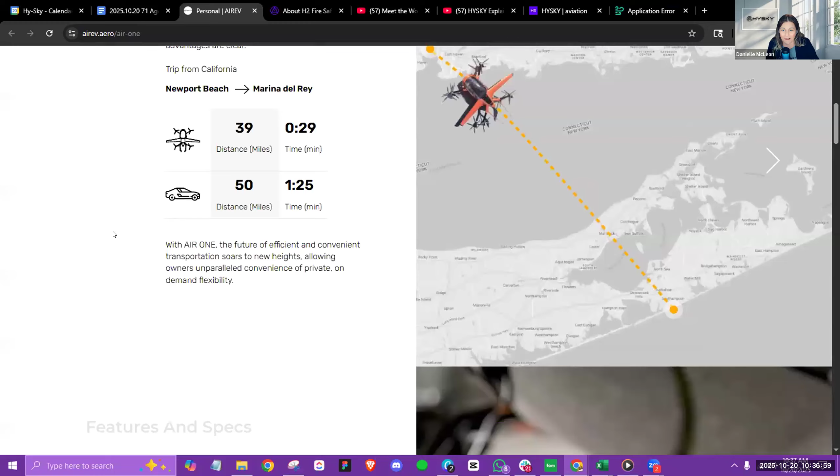Okay, so now I want to show you this company, which was kind enough to invite HySky Society to their live flight demo this morning. Unfortunately, we couldn't make it in person, so we had planned to live stream it and show you guys their flight, but again, because of the AWS stuff, we could not get it coordinated.

However, we did get some videos. So these just happened, so you all will be the first to see these videos. Let me just get it pulled up. They were done on a phone, so the quality is not the best, but you're seeing it here first.

So here's the takeoff. And then here's another one.

So you can see how quiet it is. I mean, you didn't really hear it until it gets really close.

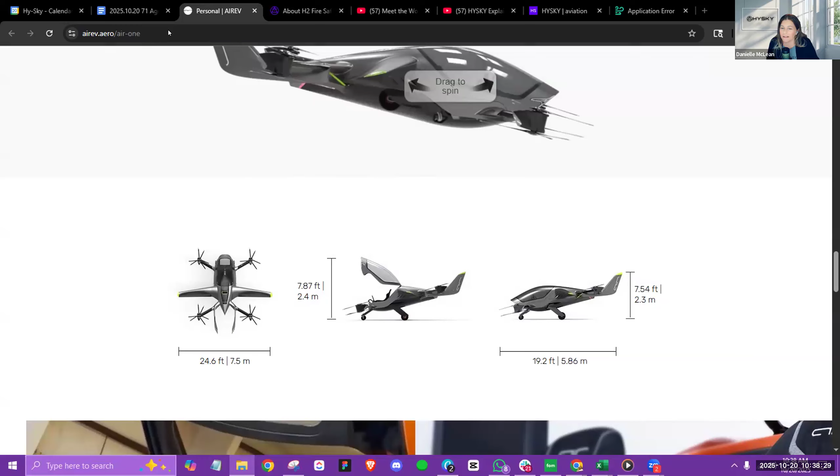So yeah, congrats to AIREV. They're an Israeli company, and this was in Florida that they did this morning. Very exciting. I wanted to be there in person. I was hoping we were going to catch the CEO's presentation, but the internet lords decided not to today.

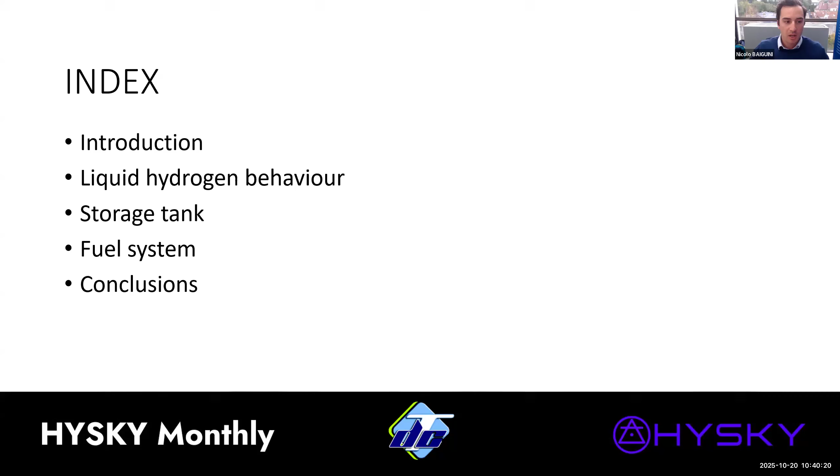Today I will present the EICLHAIR project, the development of a liquid hydrogen tank and fuel system for aviation. My presentation is divided into five parts: an introduction, the explanation of liquid hydrogen behavior, the storage tank, the fuel system, and the conclusion of this project.

Let's start with the introduction, where I present the context, the state of the art, the difference and the choice of the internal combustion engine instead of fuel cell, and the description of the project itself.

As you can see on the left, there is an image showing the direct and indirect CO2 emission by sector in 2010. Transport accounts for 14% of direct carbon dioxide emission, but almost zero for indirect. The main sources of carbon dioxide emission are electricity and heat power, agriculture and forestal and other land use, and industry.

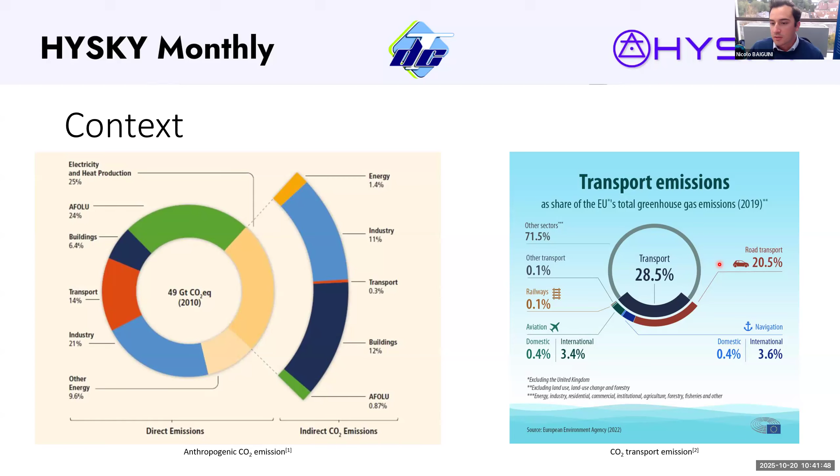How can we reduce emissions from aviation? First, we would like to reduce the on-ground time when the engine runs without moving the plane. Optimization of the flight path to reduce the distance between point A and point B. Increasing the energy efficiency of the engine, and using fuel that does not produce carbon dioxide, such as hydrogen, or at least has neutral CO2 production.

That means fuel produced from green sources, from captured CO2, or from biogas or biomass.

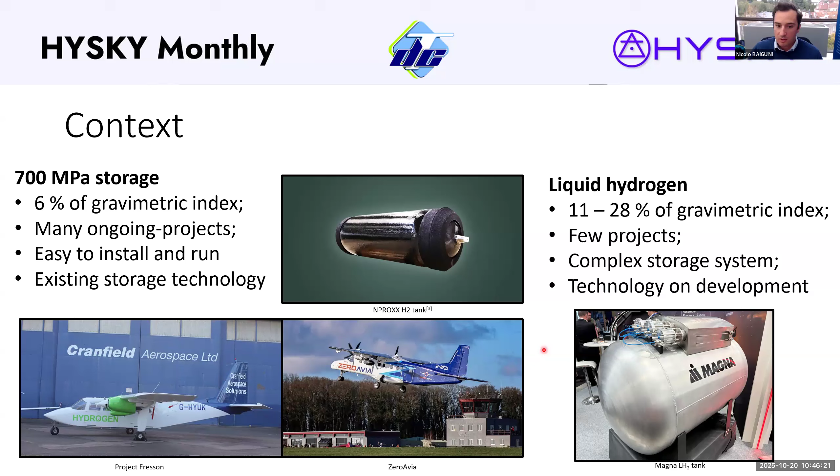Here is an example of storage technology from Magna, which is a liquid hydrogen tank, the kind they use for aircraft, but they are still prototypes. They are not yet at the same level as the gas technology.

The aim of this project is to develop a liquid hydrogen tank to run a fuel cell, which can guarantee at least 1,500 kilometers of range of flight.

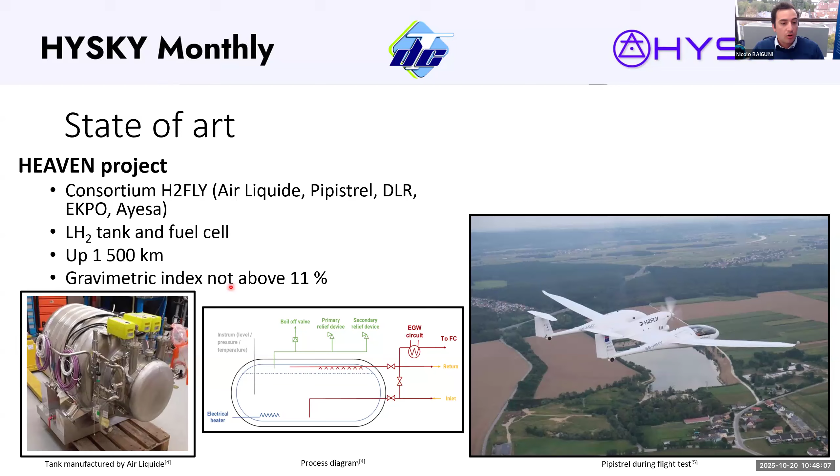This tank is based on the following process diagram reported here. We have a heater to maintain the pressure in case of pressurization of the tank. The liquid hydrogen is extracted simply by the difference of pressure between the tank and the fuel cell. In case of over-pressurization, there is a boil-off of gas and a relief device that reduces the pressure in the tank. A heat exchanger is present to convert liquid hydrogen into gas. This kind of technology did not overcome the value of 11% gravimetric index.

Another project is carried by Aresia, which is developing a liquid hydrogen tank and fuel system for a sport car. Why do we talk about a sport car? Because it's very similar to the fuel system and power unit of a light aircraft.

On the left, you can see the cross-section view of the tank. You can clearly see the support, the gas and liquid pipe. The boil-off valve you cannot really see, but it is here. In this image, we can see the type of thermal insulation they're using is MLI, multi-layer insulation.

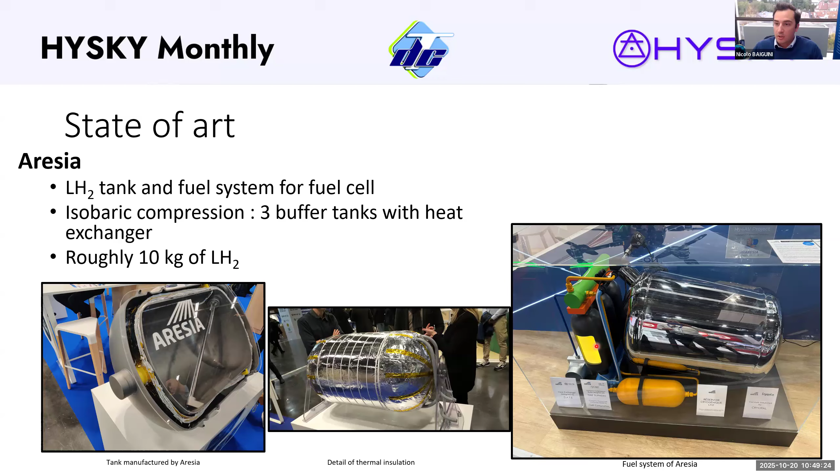However, the fuel system is completely different from the previous one. They are using 3 buffer tanks to make an isobaric compression. In the first tank, the liquid hydrogen is charged. In the second tank, this liquid hydrogen is converted into gas by using a heat exchanger. And the third buffer tank works to deliver the hydrogen to the system.

Another interesting case, even though this project is developed for a sport car, as I said before, it's very interesting for light aviation, is the Toyota GR Corolla H2, where they have developed a liquid hydrogen tank and fuel system for a spark engine.

The tank manufacturer is Ube-Shinko company, and in this report we can see that the cross section is oval and they're manufacturing the tanks in aluminum. Why did they use this type of cross section? Because they can increase the volume tank to volume occupied ratio, which allows them to store something like 15 kilograms of liquid hydrogen.

The fuel system is different, as reported in this image. You have a buffer tank, pumps, a catalyst to convert the boil-off gas, and an exhaust gas heat exchanger. This image here is just to give you an idea of how the Toyota GR looks.

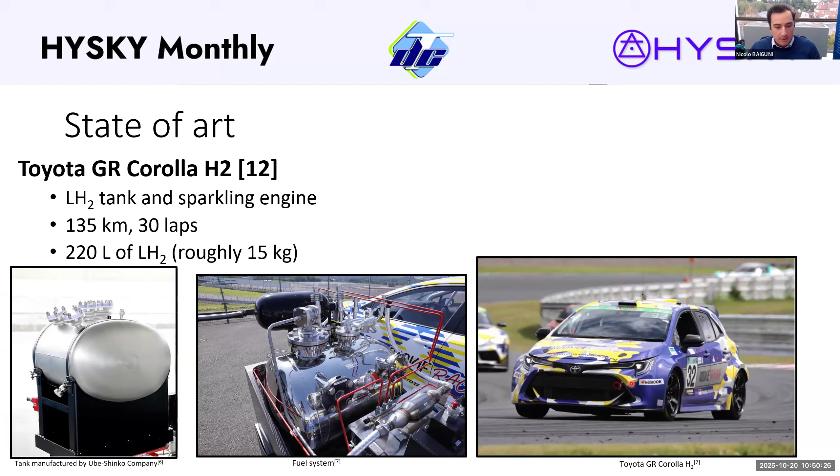Anyway, using a spark engine has some drawbacks: NOx production, noise, vibration, but they are based on common materials such as iron and aluminum, which are easily available on the market. Hydrogen spark engines are very similar to existing gasoline engines, so they allow easy maintenance, contrary to fuel cells, which are actually a brand new technology. There's not so much maintenance knowledge around the world, and they need expensive materials. Of course, a fuel cell does not produce pollutants and is more efficient.

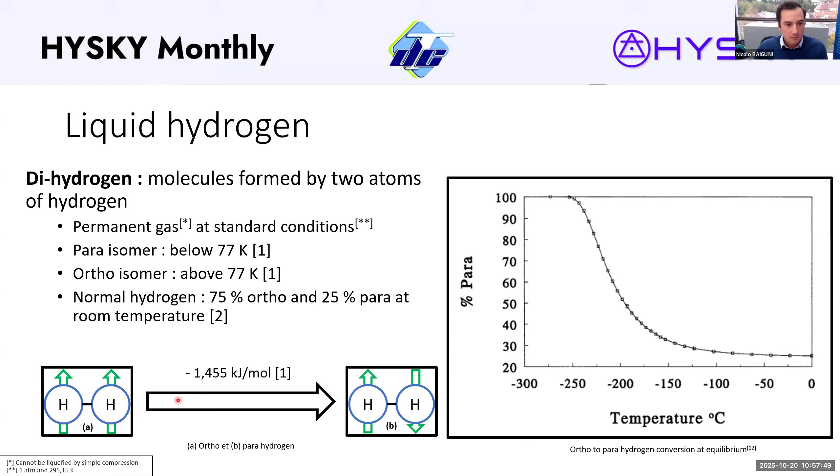What is liquid hydrogen behavior? Roughly speaking, it's the variation of pressure, temperature, and filling ratio over time. The variation of these variables depends on three main phenomena: evaporation, thermostratification, and self-pressurization.

And of course, it depends on the design parameters such as input geometry and maximum operative pressure of the tank. So how do these variables change in time? They change mainly as a function of the heat inputs on the tank. So how the heat moves from the outside to the inside of the tank. Now, why do we have heat inputs?

Because there is a very large temperature difference between the outside and the inside. Inside, we have minus 253. Outside, there are temperatures ranging from minus 10 to up to 70 degrees Celsius. So it will pass from the wall, as indicated here, will pass from the support, from the pipes, and will be instrumentation, if we have some instrumentation inside.

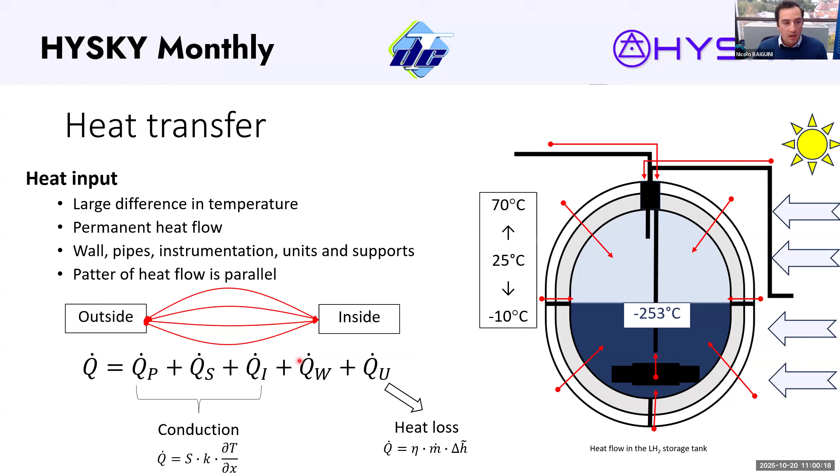But the heat transferred from the wall depends on how we design the thermal insulation. Now, how the heat moves from the outside to the inside through the walls depends on different steps. Firstly, the heat must flow from the air to the external wall, then pass through the insulation, and then move to the internal wall.

When the heat arrives at the internal wall, it moves to the liquid or to the gas. Now, the heat along this entire pathway remains constant. The heat that moves from the outside to the external wall may depend on radiation. For example, on a sunny day, radiation from the sun will increase the heat input. Or if there is wind, we may have forced convection that transfers more heat to the vessel.

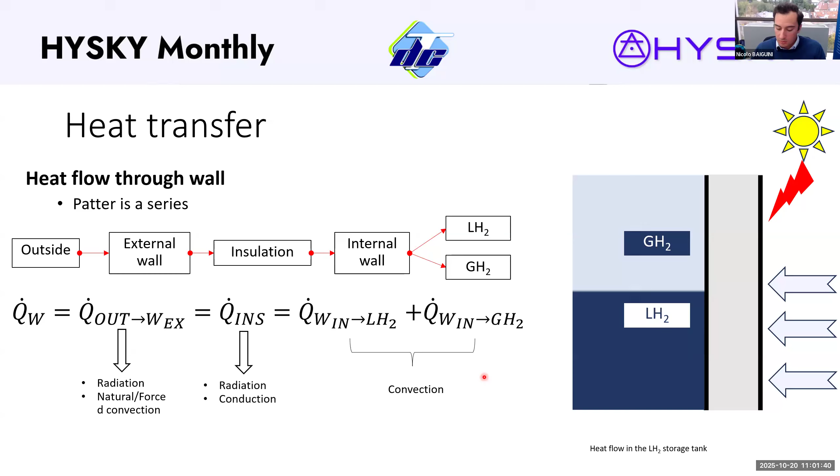The heat that is transferred into the insulation mainly depends on radiation and conduction. So if you use, for example, vacuum and MLI, the heat will mainly be transferred by radiation. If you use foam, the heat will be transferred more by conduction. At the end, the heat that is transferred from the wall to the fluid depends on convection, so how the liquid moves inside the tank.

But the ullage is thermally stratified due to the heat input that comes in, and because there is not enough natural convection to keep the temperature homogeneous.

Now, we can roughly say that all the heat that comes from the environment is converted into evaporation heat, and this evaporation heat depends on the pressure they're working at. If we increase the working pressure, the latent heat of evaporation reduces, which actually increases the evaporation rate.

So when we are in a very small tank, for example on light aviation, we cannot allow the boil-off gas to exit the tank because we don't know what to do with this boil-off gas. So usually we close the tank, but by closing the tank, we increase the amount of heat and mass that is trapped in the ullage. We actually increase the pressure. This increment of pressure is what we call self-pressurization.

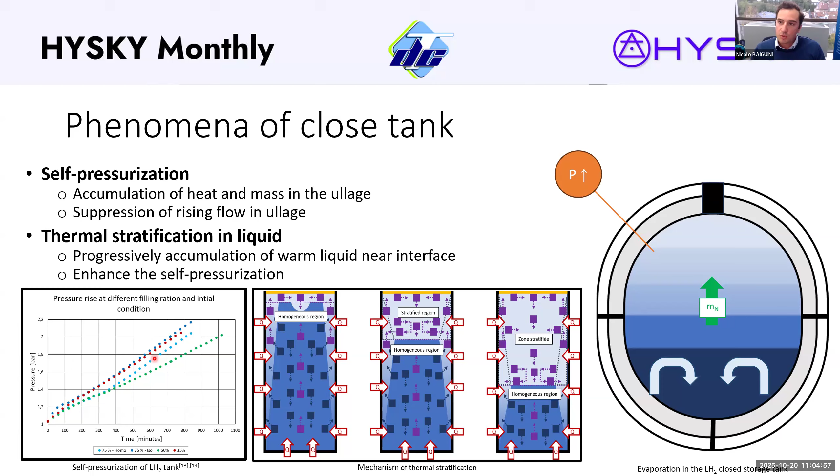Now, sloshing is another important phenomenon that can occur on a light aircraft, because the tank is moving. It may happen when the tank stops, for example when landing, and the liquid moves. So if the tank is open, we expect the liquid will climb on the surface, and the hot surface will be quickly cooled down, creating an excessive production of boil-off gas. It's almost instantaneous, it does not really impact the system.

Now let's move on to how we have designed the tank and our approach to designing it. In this part, I will present the architecture of the tank, the rules that we used, the operating pressure, how the mass has been optimized, how we chose the shape of the tank, how we designed the thermal insulation, and the system for controlling the pressure.

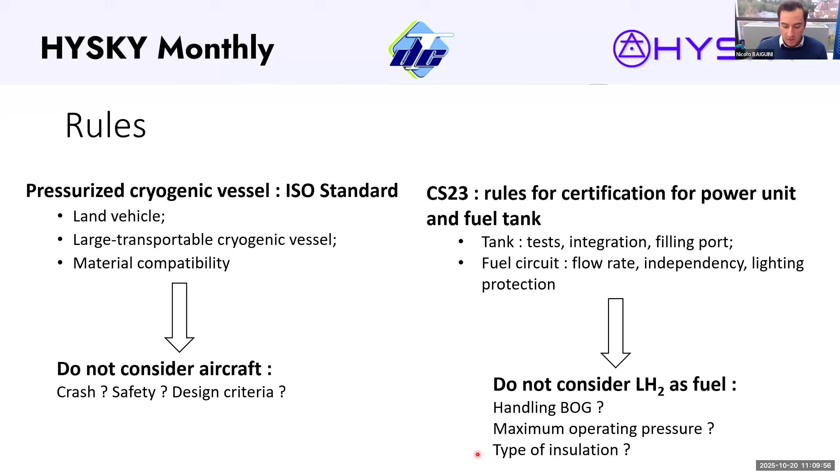So how do we do it? We started by looking at the operative pressure. There are two operative pressures, the maximum and the minimum. The minimum pressure must be above 1 atmosphere to avoid air leakage into the tank, but the maximum operative pressure depends on the geometrical form, material of the tank, and all the necessary inputs.

Now, this operative pressure directly affects the mass of the tank, which is composed of the mass of the liquid hydrogen, the mass of the insulation, the mass of the support, and the mass of the inner vessel, the mass of the jacket. The mass of liquid hydrogen we carry inside includes the mass lost in evaporation, the mass of useless fuel, and the mass that must be kept inside as usable fuel.

Now, if we increase the thermal insulation a lot, we can minimize the hydrogen lost by evaporation, but we increase the mass. On the other hand, if we reduce thermal insulation to the minimum required value, we increase boil-off a lot, losing more hydrogen by evaporation. If we increase the operative pressure as reported here, we simply increase the thickness of the wall, which increases the mass.

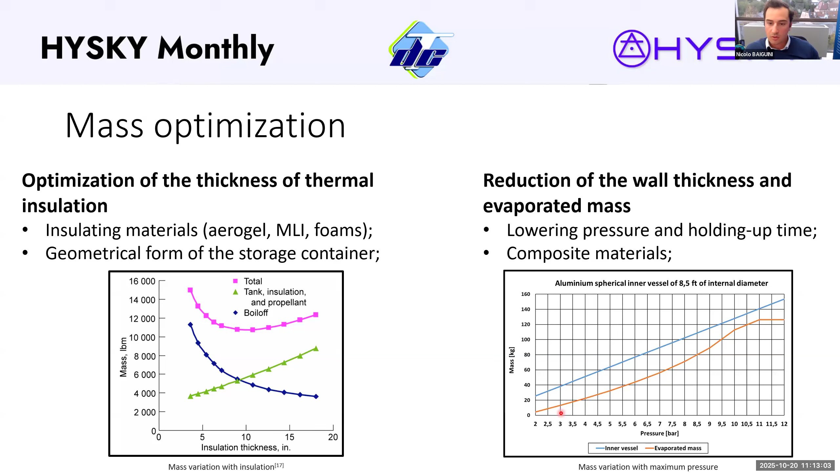Now, regarding the shape of the tank: if we look at how aircraft are built, you can see tanks are placed on the wing and in the center of the aircraft, as reported here, showing the Boeing fuel tank of the 787.

As we can see, the form of the tank is, roughly speaking, cuboid or parallelepipedic. We may think that to design the shape of the tank, we should try to fit a sphere in a cube or a cylinder. Between sphere and cylinder, it's better to use cylinders, as shown here, since the tank volume to occupied volume ratio is higher.

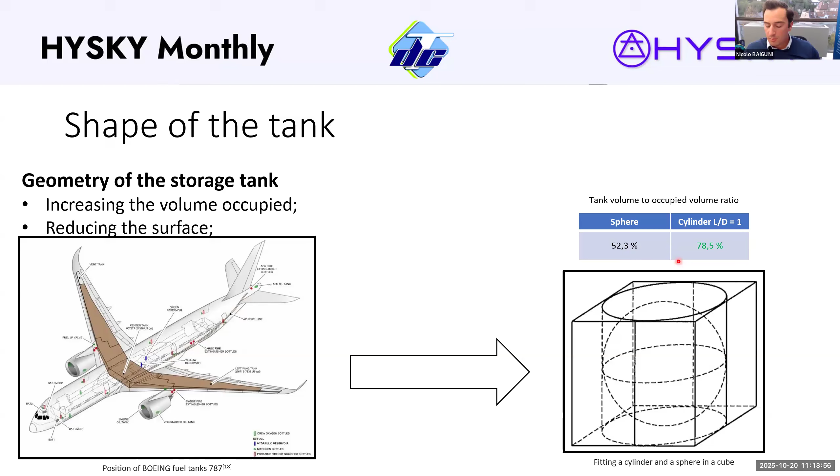But actually, this is not the right way to approach it. If you look at this image, the cross-section geometry of an aircraft is not a cube, it's a circle here, an ellipse there. So the problem is how we can fit a tank into a circular sector. The circular sector is the green part here, which corresponds to that part of the cross-section area of the aircraft.

Now, looking at the kind of geometry, we can easily see there are two types of cross-sections that can fit: elliptical or oval, as shown in this image comparing the cross-section for an oval and an ellipse. The ellipse is the red line, the oval is the blue line.

You can see that an ellipse can have a higher cross-section, which means higher volume. So if we apply this concept to the IC-10, we can clearly see that the cross-section should be an ellipse. So the cross-section of the tank should be elliptical or spherical at least.

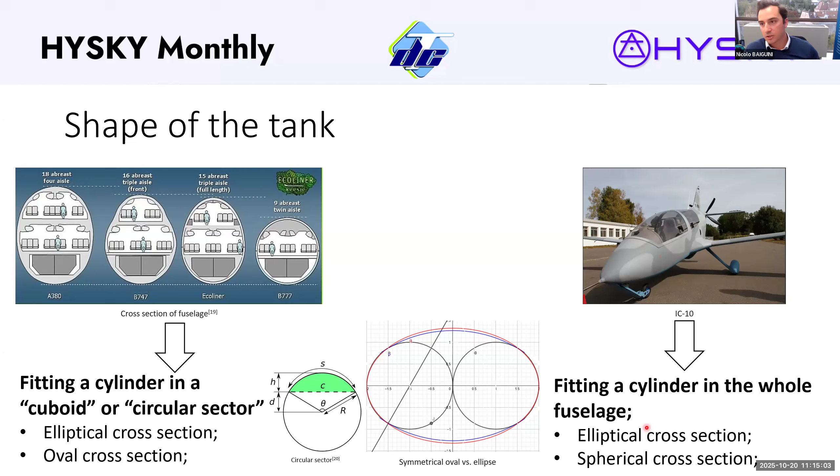Now, the shape of the tank also affects the tank volume to occupied volume ratio. As we can see, if we compare the circular cross-section to the elliptical section, the elliptical section allows much more tank volume to occupied ratio, and this ratio increases with the ratio between the major axis and the minor axis.

At the same time, we have some problems dealing with pressure, because as reported in this analysis of deformation of an ellipsoidal section of a cylinder, the maximum deformation in this type of cylinder is on the maximum axis. The circular section does not have this type of deformation because it's much more uniform over the surface. So we need to stay low on pressure if we want to have an elliptical tank and increase the volume to tank ratio.

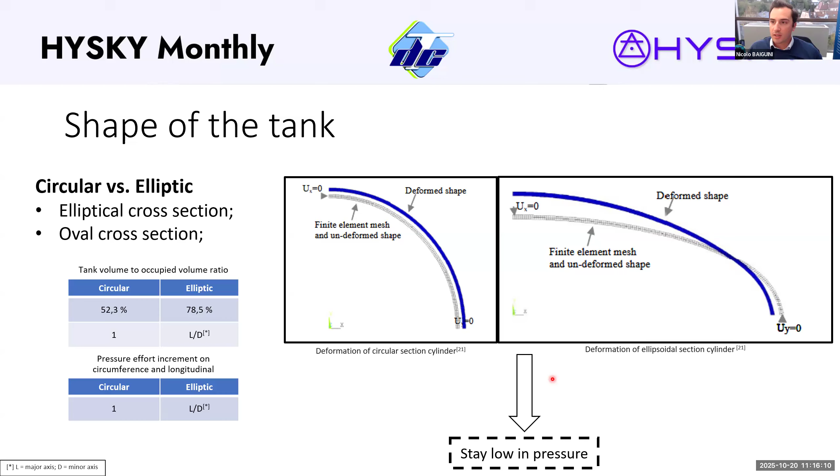Now, thermal insulation, how do we design it? We have to keep in mind that we have to reduce as much as we can the heat input, and at the same time, we have to reduce the mass.

Now, the heat that comes from the pipes can only be reduced by increasing the length of the pipes. For example, this has been done by the Netherlands Aerospace Center, where the tube is not straight, but shaped like a spring, which is done to increase the length and reduce the heat input.

but we cannot really work on the length because it's fixed by the vacuum jacket, but you can work on the material. So if you use polyamide as reported in this case, you can strongly reduce the heat coming from the outside. And also we would like to reduce the surface contact. One example is given here, where we have used a composite ring to minimize the surface of contact between the outer and inner vessel.

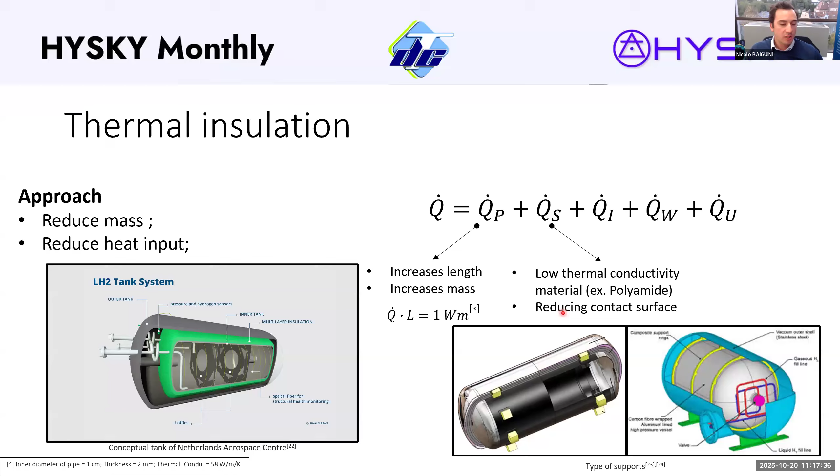But if you want to reduce the heat coming from the surface, there are three main insulating materials that can be used: foam, aerogel, and multi-layer thermal insulation.

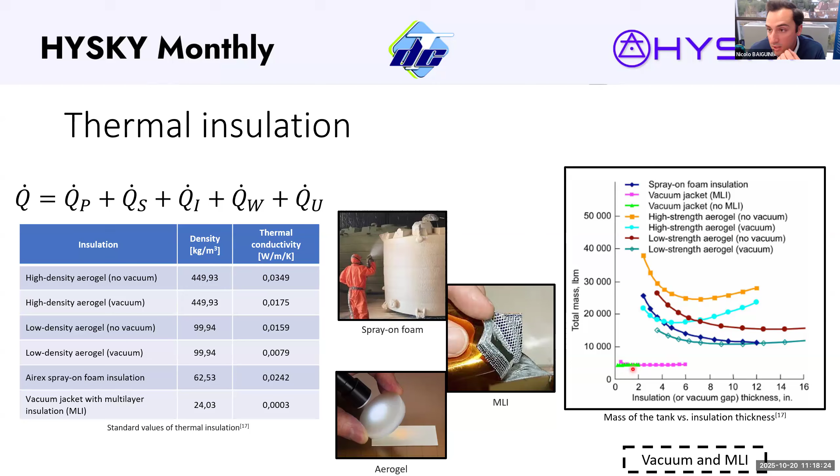Thanks to NASA, who did a lot of work on that, they have published results concerning the amount of mass required to insulate a liquid hydrogen tank for different types of technology. As we can see in this measure, the vacuum jacket with MLI technology, which is the purple line here, allows the minimum mass to guarantee the same amount of heat input into the tank. So this means that MLI for a liquid hydrogen vessel is a very good choice.

Now, the last part is how we control the pressure inside the tank. We don't want to have overpressure or depressurization of the tank. So to avoid depressurization, we can use a pressurization gas, which is often helium.

We can return part of the gas that we are feeding to the engine back to the tank, or we can use a heater. Usually, using a pressurized gas is actually expensive because we need to install a pressurized vessel. Helium is really expensive, but its main advantage is that it's simple.

Return gas technology is simple, but we have to consume some fuel to pressurize the vessel. And the heater, of course, does not need fuel consumption, but we have some heat leakage that can enter from the pipe of the heater, and of course adding heat when we want to keep it cool is not very ideal. So for us, it's better to stay with a return gas solution.

Now, how do we avoid overpressurization? It's very simple. We use a boil-off valve that opens when the pressure is above a certain value. We can use pumping, using a pump that can create the same effect as sloshing inside the tank. And we can also use a cryocooler.

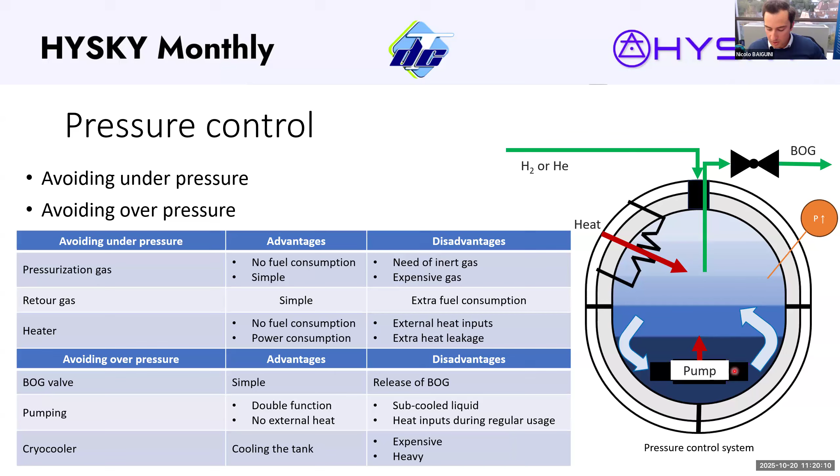Among these solutions, using a boil-off gas valve seems the easiest, and adding a pump inside the vessel also seems a good choice, because keeping pumps inside the vessel allows them to work more efficiently than outside.

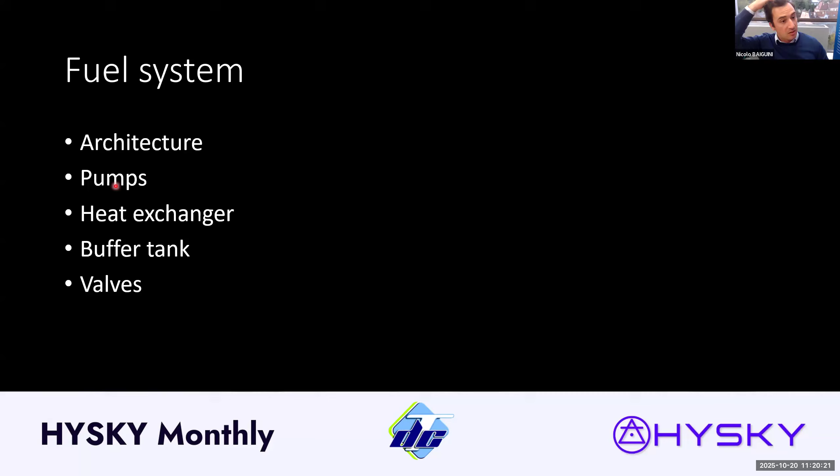Now let's move to the fuel system, which is the architecture: how the pumps have been designed, the heat exchanger, the buffer tanks, and the valves.

As you see, with cryogenic storage condition, we need to bring the hydrogen to a warmer condition, because we cannot feed a cryogenic condition inside the internal combustion engine. The pressure accepted by the engine is around 40 bar, and the flow of fuel actually changes a lot during the mission, as reported here. We start our mission with 100% amount of power, and we conclude the mission almost at 0.

So actually, we have seen that there is a high compression ratio, high temperature increment in the fuel system, and the flow is variable in time. So actually, we need valves to control the flow, a pump or compressor, heat exchanger, and buffer tank, roughly speaking.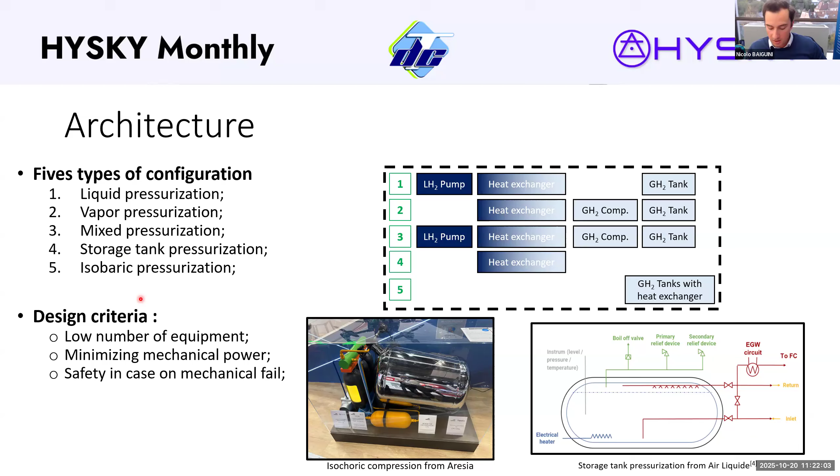We would like, as always, to reduce the number of equipment, minimize the mechanical power used from the engine, and ensure safety in case of mechanical failure. Now, if we consider the working pressure of the tank, the number of equipment, and the mechanical power, it is almost easy to understand that the better solution is to use liquid pressurization.

So using a simple pump and compression, and eventually a buffer tank, because we can guarantee the lowest value of pressure inside the tank, a relatively low number of equipment, and minimizing the mechanical power. Why? Because, from a thermodynamic point of view, pumping a liquid requires less energy than compressing a gas.

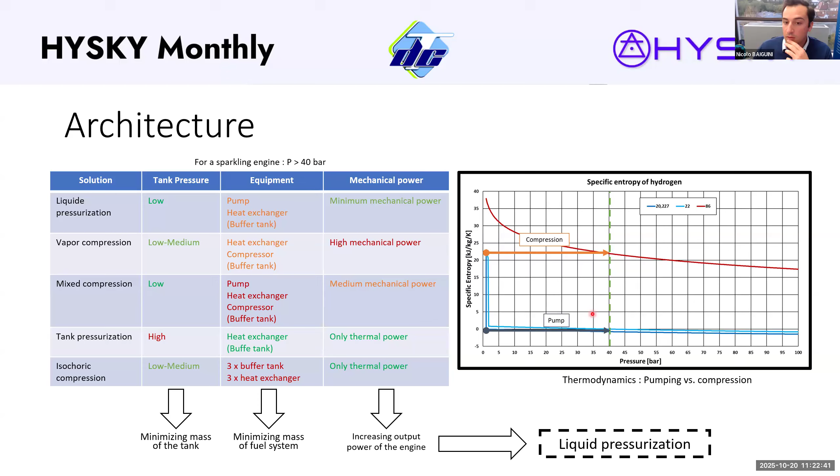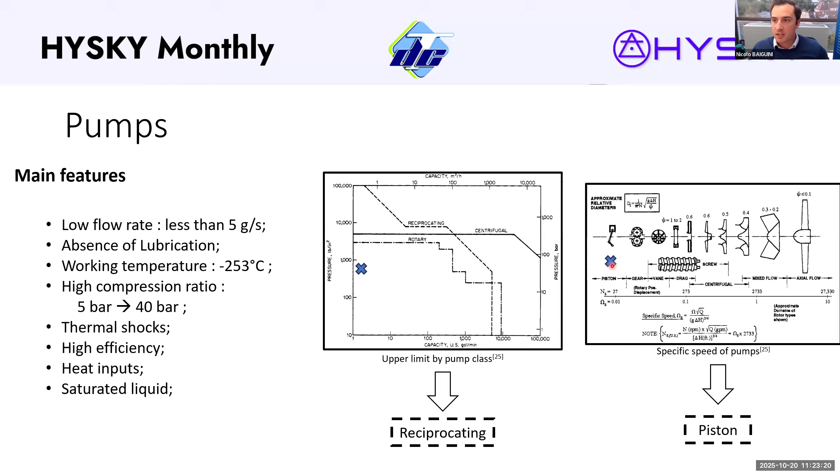There are different examples of existing pumps. For example, one from Toyota is used, but this type of pump is very heavy and big. The compression chamber is directly submerged in the liquid hydrogen, but the motor is outside, which actually is not very suitable because there are a lot of inputs to the system.

What seems most promising is using a magnetically activated pump, for example SCAMP pump from P3Tech, or using the one from cryo pumps from ILK Dresden. Anyway, these types of pumps are really expensive. They are still prototypes, at least for the German technology here, and they must be tested in an aircraft environment.

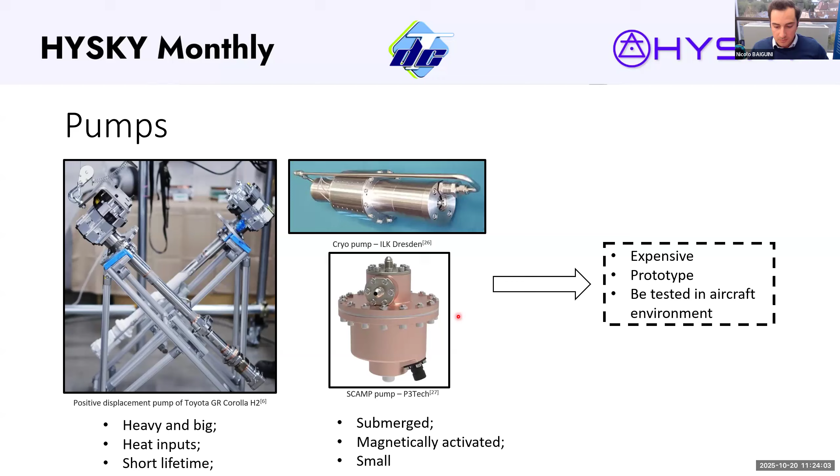Now, the other main unit is the heat exchanger. We would like to avoid the phase change of the heating fluid. There is, as said, a big temperature difference, and we want to use a fluid that is available on the aircraft, so air, exhaust gas, or cooling water.

Now, if you look at this table that synthesizes the main drawbacks and advantages of using each fluid, we can easily see that air is largely available, but very dependent on the altitude and weather conditions. We cannot go below 10 degrees Celsius. Exhaust gas is a little bit hotter and more stable in temperature, which can be a good solution, but it can affect the running of the engine.

And then you have the cooling water, which is actually at a temperature between 90 and 100 degrees Celsius. You can go down to minus 38 degrees Celsius if you add some glycerol. And if you do some rough calculation, we need 19 kilowatts to bring liquid hydrogen from minus 253 to minus 20, so roughly we would need 1.3 kilograms of air, which is a lot.

The exchange can be done with exhaust gas, but if you use cooling water, we can really see that we have a lot of water we can reuse for heating up the liquid hydrogen.

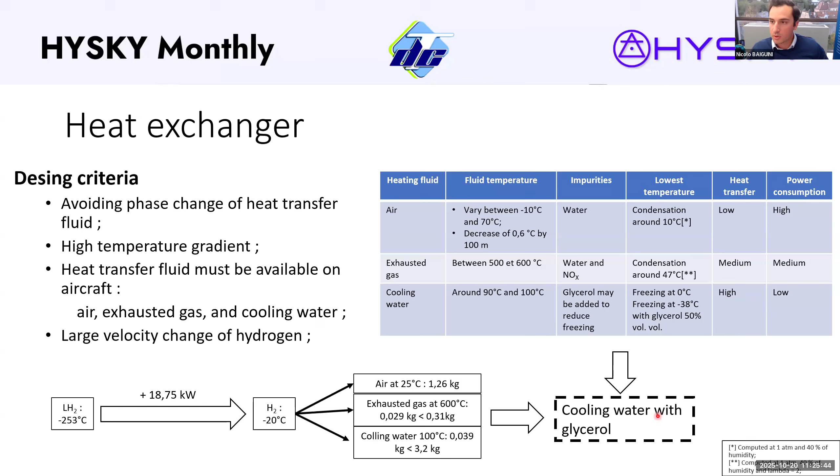So we think we can use that solution, the cooling water with glycerol. Now, we would like a simple configuration, because simple configuration means simple manufacturing, and we would like to minimize pressure drops. The solution we use is a double pipe counterflow heat exchanger, where the liquid hydrogen flows in the inner pipe and the heating fluid flows in the external pipe.

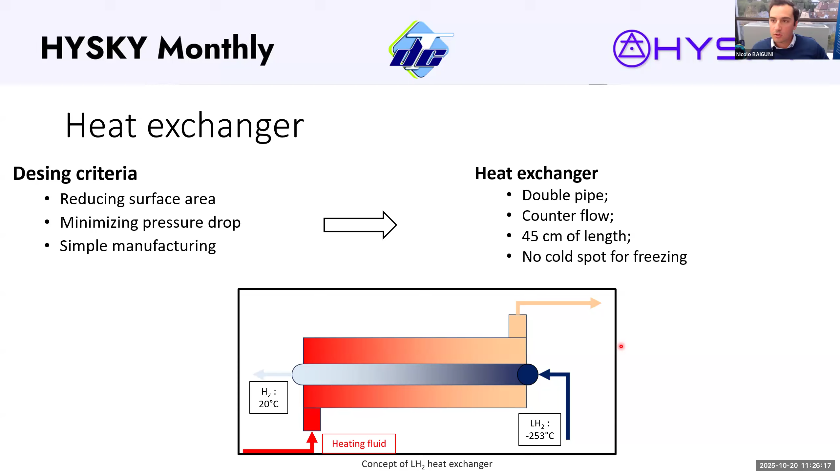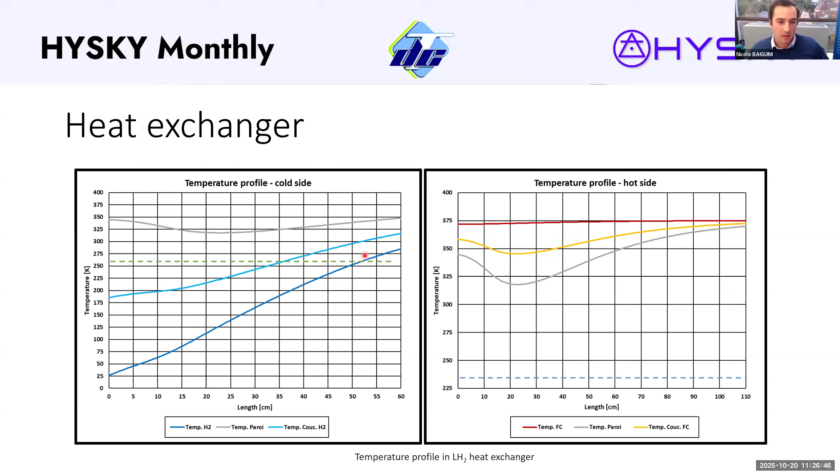Now, why do we need a buffer tank? Because we need to smooth the variation of the flow over time. We need gas for starting the engine. And if for some reason the pumps do not work, we need some hydrogen to run the engine and assure the function of the aircraft.

If you increase the pressure of the tank, we reduce the volume. That's what we want, but at the same time we increase the mass of the tank. This is not what we want, so we need to optimize this parameter to have a compact and optimized pressure buffer tank.

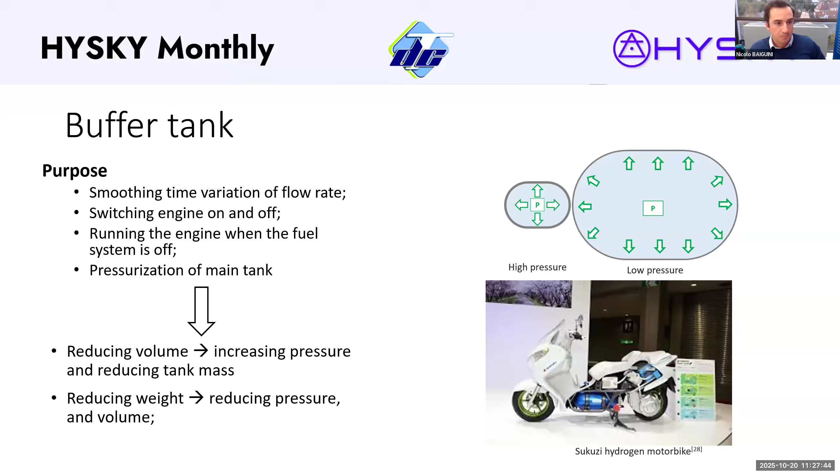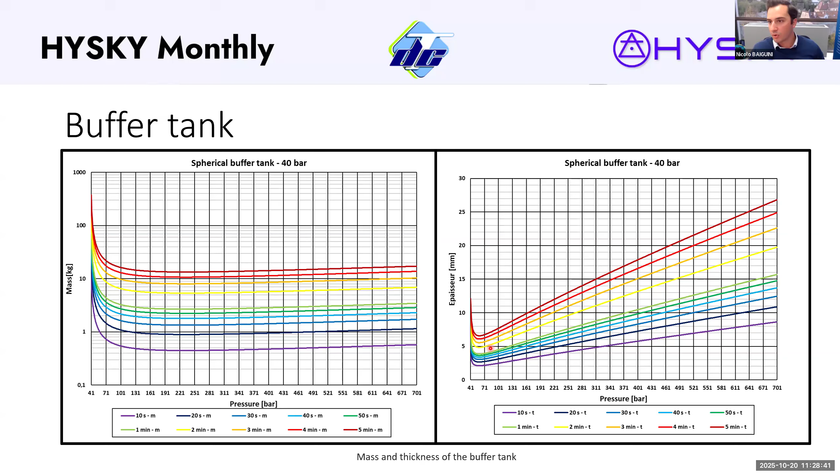It's hard to see, but there is a minimum value around 200 bar that minimizes the mass. And on the right, there is the behavior of the thickness of the wall. We can again find a minimum as a function of pressure, due to the way we reduce the volume when we reduce the pressure. So we reduce somewhat the effort on the material, but at the same time increasing the pressure means we bring more effort on the tank.

Now the valves are another important element of the fluid system. For the gas part of the fluid system, small scale valves already exist for hydrogen, and they can easily go down to -50 degrees. On the other hand, if you need valves for the liquid hydrogen part, the cryogenic part, they are hard to find, and maybe they do not exist.

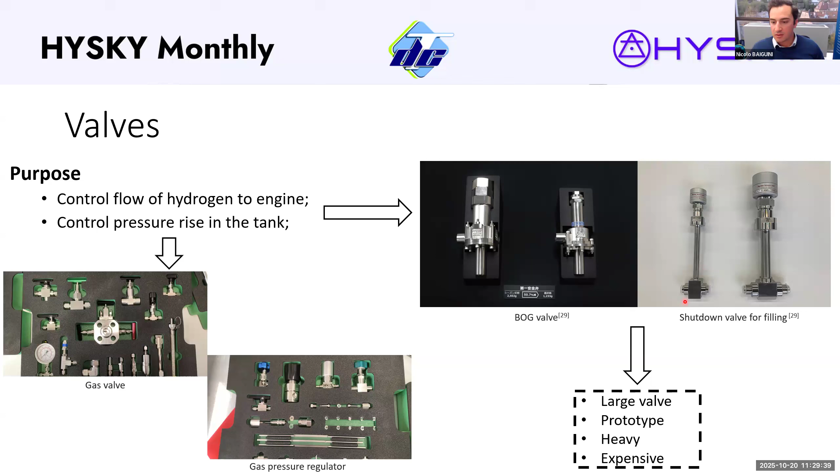Now let's move to the conclusion of the presentation. We have seen that even if aviation does not produce so much carbon dioxide emissions, we need to avoid it and change the fuel we use. We need to use hydrogen for aviation. We see that the fleet is very old, and liquid hydrogen can be used as a fuel.

We have seen the phenomena of liquid hydrogen that affect the design of the tanks, such as heat transfer, self-pressurization, and thermal stratification. We have seen the structure of the tanks, the architecture. We see there are no rules for designing the tanks. We have seen how to deal with operative pressure, how to optimize thermal insulation, and how pressure control is designed. And for the fuel system, we have seen the architecture, so pipes, pumps, heat exchangers, buffer tanks.

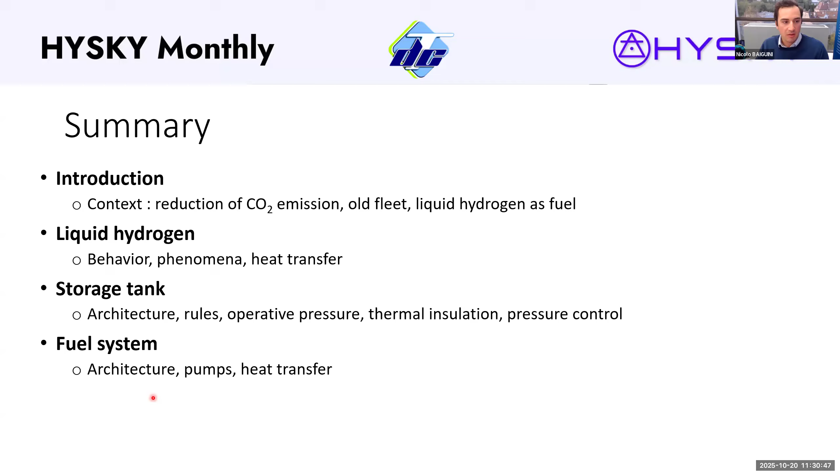We have seen that the pump was already existing. Heat transfer is not so complicated, but the main critical point is the valve. The main point that should remain is that the use of liquid hydrogen with an internal combustion engine can be a very good solution for light aircraft.

We must be aware of the pressure variation inside the tank and the fact that liquid hydrogen always evaporates. We must keep in mind that the pressure must be kept as low as possible in the tank, to use different shapes. Thermal insulation must be optimized to reduce the mass, and return gas can be used for controlling the pressure.

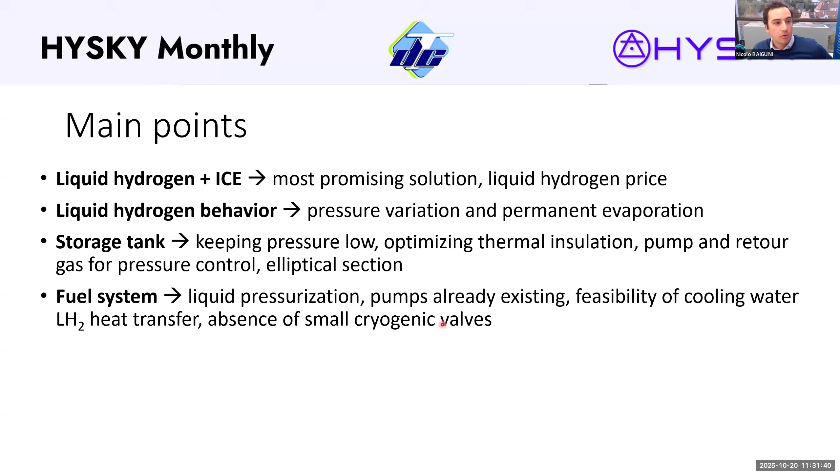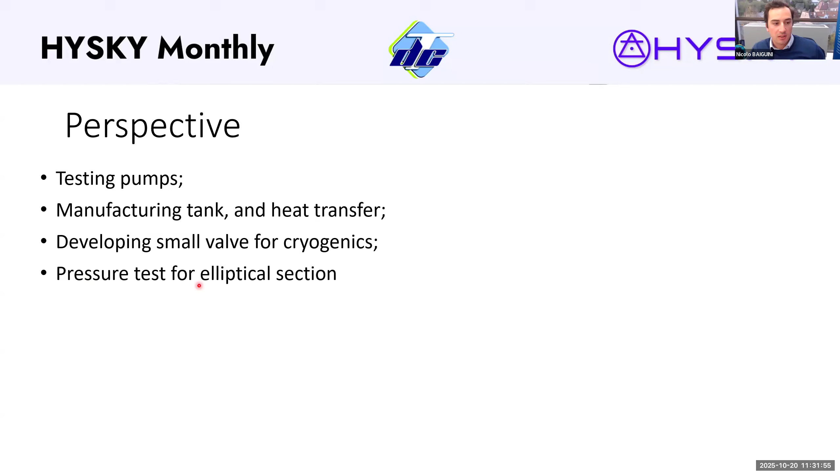The fuel system's main problem, as we can see, is the valves - how we can design valves that can be put on aircraft. Also, the perspective with Roger includes testing the pumps, manufacturing the tank, and running tests on heat transfer. We'll develop small scale valves for cryogenics, and test the tank for pressure on an elliptical section.

Thank you very much for your attention.

Wow. Absolutely amazing. I hope you all can hear me okay. I was having some audio issues. Do you hear me, Nicolò? Yes, I can hear you, Danielle.

That was such a huge contribution to the hydrogen aviation ecosystem. Thank you for the good memories - it's been a minute since I've seen first law thermo equations. And we've got a lot of questions in the chat, but I'll start just kind of breaking the ice.

Did DTC develop the tables, equations, and charts, or did you find them in several locations and put them together? I'm wondering if there's a consolidated place where I might be able to see and do some examples. I could see that being valuable.

We have used some works from NASA because they have the main source for this type of project. Then the design of the process diagram, the design of the tank, and the choice of materials and type of thermal insulation is something we have done ourselves. Our design has not been approved by an external company.

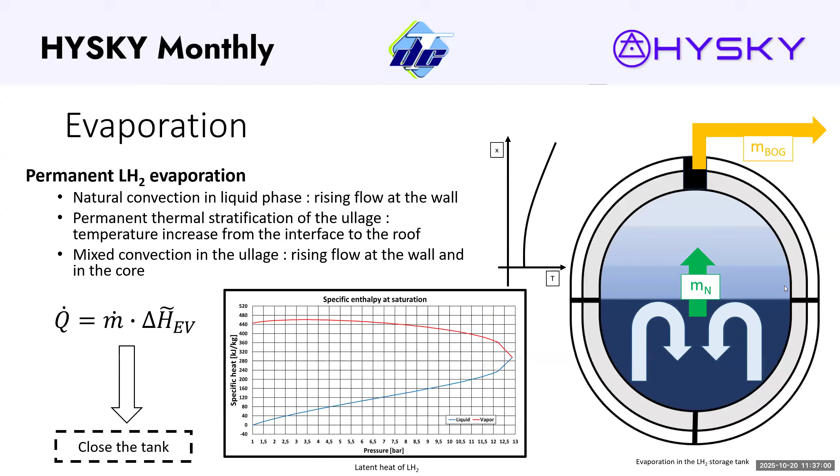I really just had a comment back from when you were talking about the benefits of fuel cells versus internal combustion engines. I had heard through the grapevine, from the few folks working on ICE hydrogen engines, that one of the nice things is that regardless of how long you run them, everything stays pristine inside. There's no carbon buildup on anything, and the oil basically stays pristine. So from a maintenance and longevity standpoint, that might really have a lot of impact.

Exactly. One of the reasons why we have chosen the spark-ignition engine is because the architecture is almost similar to the one used on a gasoline car or gasoline aircraft. Piston, cooling systems are almost the same, oil system, lubrication. Yes, of course you have to change some parameters. For example, you have to be sure that the oil you use is suitable for hydrogen.

Because hydrogen is a very small molecule, it can attack oil. You have to be aware of leakage, so you need joints that are suitable for hydrogen. You may also be aware of hotspots. Hydrogen has a lot of heating value, so the temperature in the chamber is higher than with gasoline, if I remember well. So there are technologies in the system to reduce the temperature in the chamber.

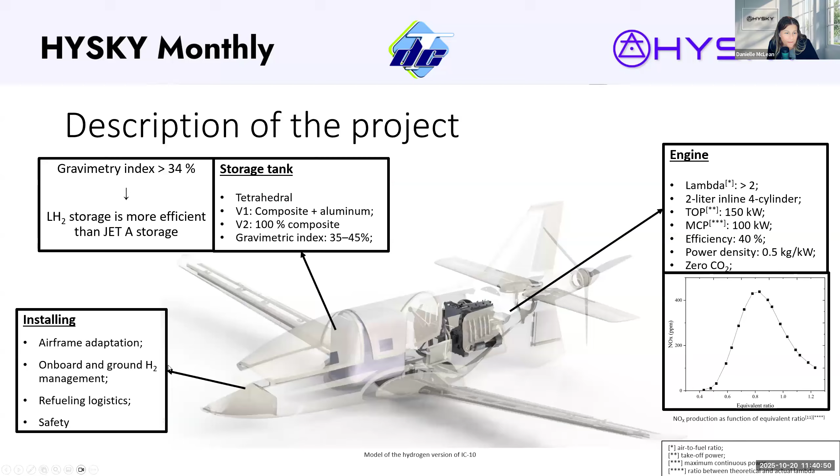I'm sorry, I didn't hear your question. I think there's some trouble with the audio. If you scroll up in the chat, you'll see it. His comment was that power density is usually watts per area. That's his comment, but that's not what I've usually seen. Do you want to comment on that?

Yes, when I searched for some values, I found there are different ways of defining this property. Of course, you are free to say the opposite, but I found values that I think are really representative of what we need on our aircraft. We need something that is light and powerful, so I searched for values of kilograms divided by power, to give that idea of light and powerful. That's what we want on our aircraft. And today's standards are not yet as light and powerful as the spark-ignition engine.

But I know that they are working on fuel cells that can be compared to spark-ignition engines. Oh, good. Oh, thank you.

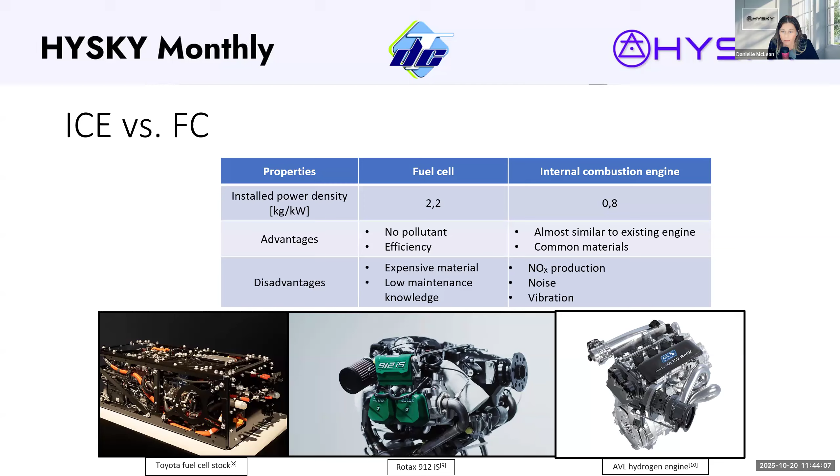Thank you, I had the next question. It was on your equations when you were showing what the mass, there was one variable, what was the last one, what is mHell, which is funny, I didn't catch that one.

My audio cut out. ML? mHell, I don't know if that's what you called it, but it's at the bottom of the equation to the right, where the arrow's going down, where the mass of the liquid, the LH2, what was that, sorry, the hell?

Okay, here, thank you. Yes, because we cannot use all the liquid hydrogen that we have in the tank, because part of the liquid hydrogen must be kept in the tank to keep it cool, to keep that cryogenic temperature.

If we remove all the liquid hydrogen, as we have seen before, due to the heat inputs from the environment, the gas that remains will become warmer and warmer. So if we left an empty cryogenic tank or an empty liquid hydrogen tank, after some days, the temperature inside would go close to the temperature of the environment.

And okay, if you gotcha, if you want to run, we have to cool down the tank, which actually takes time. So we have to first keep liquid hydrogen inside to keep it cool. Got it, thank you.

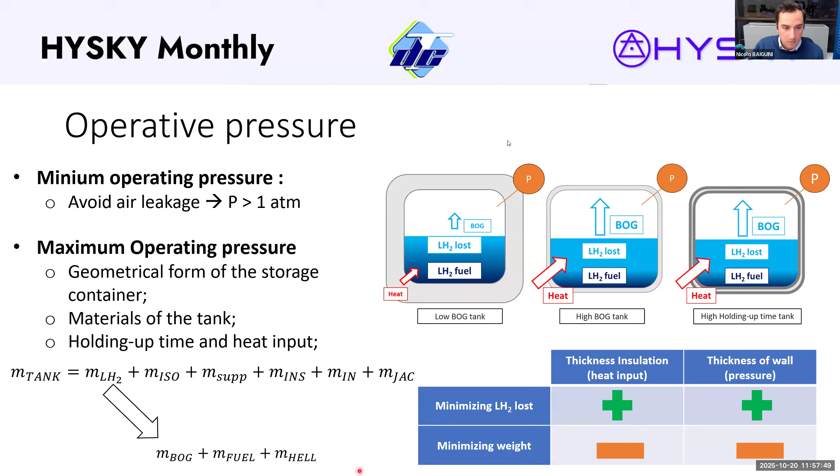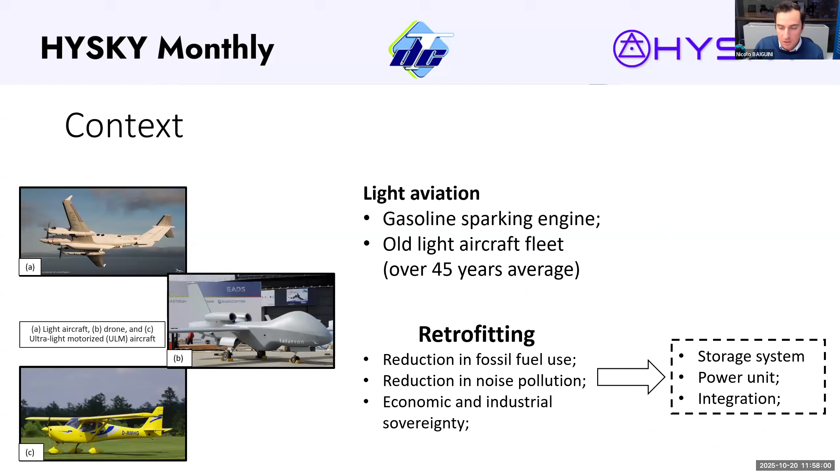SAF is usually more expensive than hydrogen, and Jet A is the cheapest. Right, because it comes from fossil fuel, and the other fuels - hydrogen and SAF - they are actually quite expensive products.

Okay, so you are using 142 megajoules per kilogram, right? That's what you're saying. Yes, sir. Okay, thank you. You're welcome, great question, thank you.